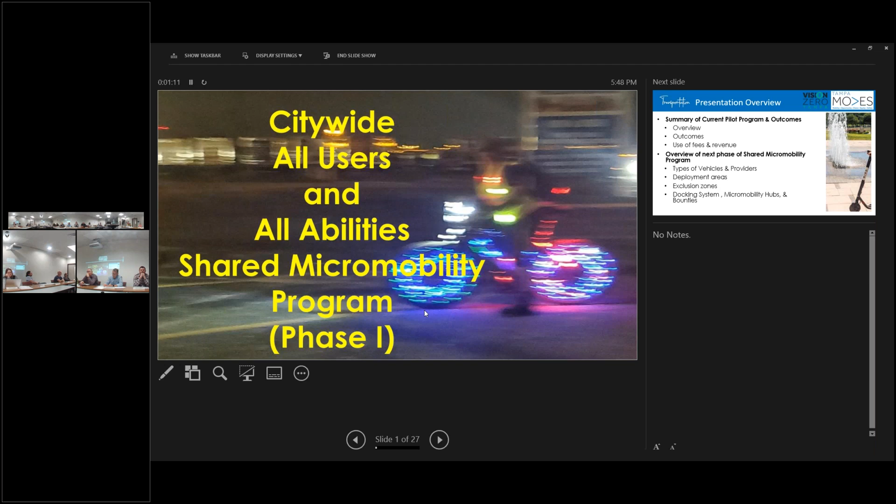Okay, hi, my name is Calvin Thornton. I'm the City of Tampa micromobility engineer. I was asked to give a quick overview of the program we have and talk about some of the things that we've done with micromobility. So tonight I'm going to give a summary of the current pilot program and an overview of the next phase of micromobility within the City of Tampa. Things we would talk about in this phase: an overview, outcome, use of the fee, types of vehicles, the deployment zone, exclusion zone, and the docking system. I won't cover everything on every slide because I shared with Wade the PowerPoint presentation, so there's a lot of information on the slides and I won't cover everything.

Summary of the current pilot program: initially, when we launched the pilot program back in 2019, we had 4 providers: Bird, Lime, Jump, and Spin. Each provider provided over 600 scooters per provider. To date, we have collected in revenue $1.9 million in fees from those providers, and that went directly to the City of Tampa coffer.

We have partners with the program. Our partners are University of South Florida, the CUTR Center, and the Valerin Group. The Valerin Group assists us in community engagement and outreach, and USF and the CUTR Center provide monitoring, community evaluation, operation, and best practice.

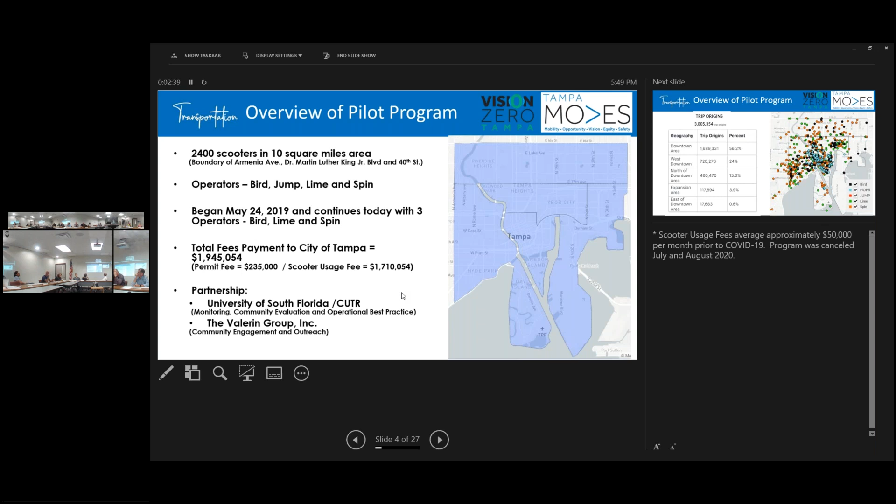As you can see, the pilot program was 10 square miles in and around the downtown area. Since the program's inception in 2019, we've had 1.6 million trips in and around the downtown area, about 700,000 in the west downtown, which is the Hyde Park area. In the north downtown and Ybor City area, we've had about 500,000. So clearly people are using micromobility in just that small 10-square-mile area.

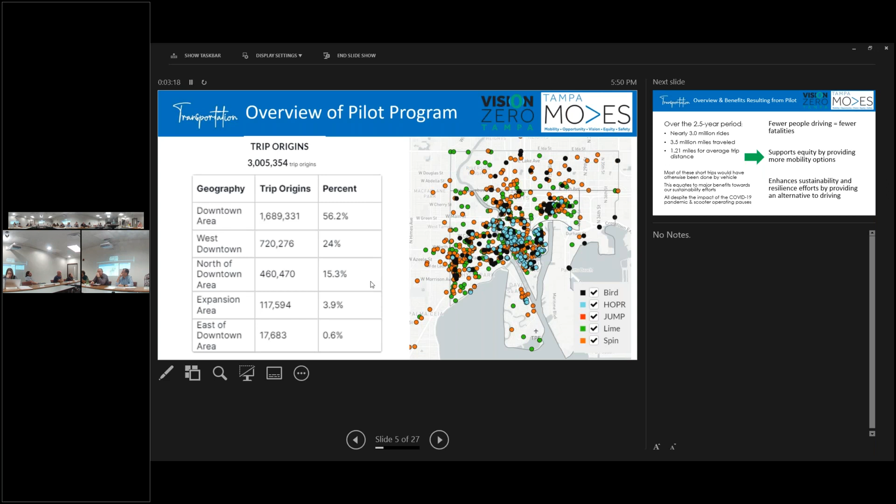This is just a repeat of what I just said. Some of the things that we've observed are fewer people driving, fewer fatalities.

One thing this does provide is some equity. I'll give you an example. When I was working in my downtown office, an individual who was cleaning the carpet came by and saw the helmets on the back wall and said, 'Hey, you got anything to do with those scooters?' I said yes. He said he used those daily to travel back and forth from downtown to work. Normally it would cost him about $5 to pay a friend to ride back and forth, but now he can ride the scooter for about $3. So it does provide some mobility for people who don't want to rely upon more costly service like a friend or the Uber system. So it is working.

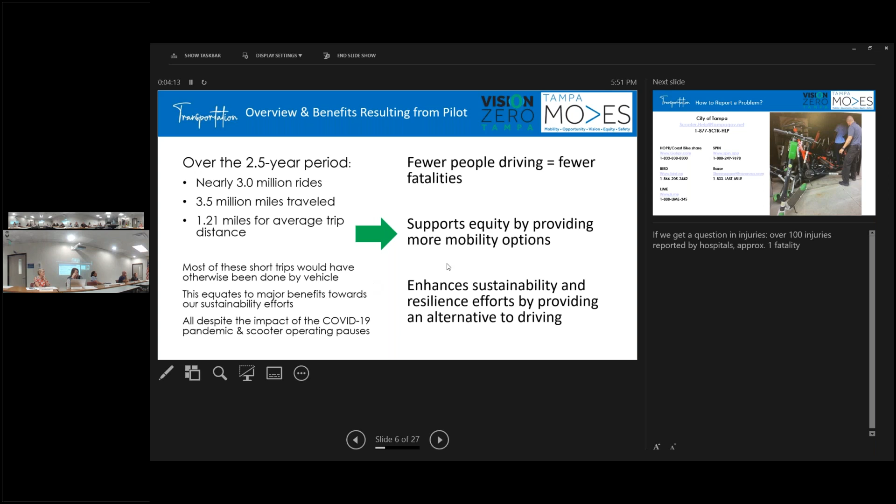We also have a number where you can report any problems. If you have a scooter that somebody left in your front yard, or if a scooter's blocking the sidewalk, we have a 1-800 number: 1-877-SCOOTER-HELP. We also have an email address, scooter.help@tampagov.net, as well as on our website, where we have all of the providers' information so you can report any problem. When we receive a problem, we immediately send out the provider and they correct it immediately.

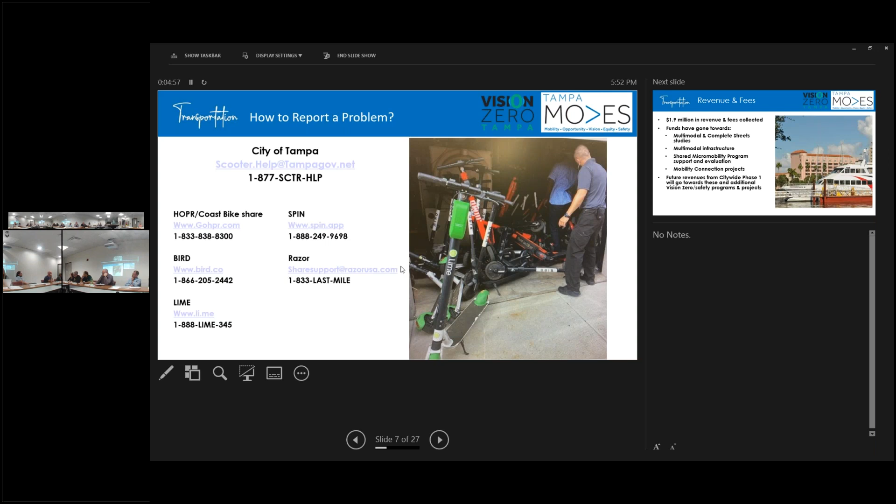Of the $1.9 million in revenues, we've spent them on things like the multimodal complete street studies, multimodal infrastructure, and working with our USF partners to evaluate the program. We've also spent some of it on connectivity.

We've contributed funds towards the Cross Bay Ferry. So you can get on a Razor scooter here in Tampa, ride the Cross Bay Ferry over to St. Pete, then get on another Razor scooter and ride around the city of St. Pete. So you can make a trip from Tampa to St. Pete without ever having to get into an automobile. You can also do the same with the Coast Bike, which is over here as well, and also in St. Pete.

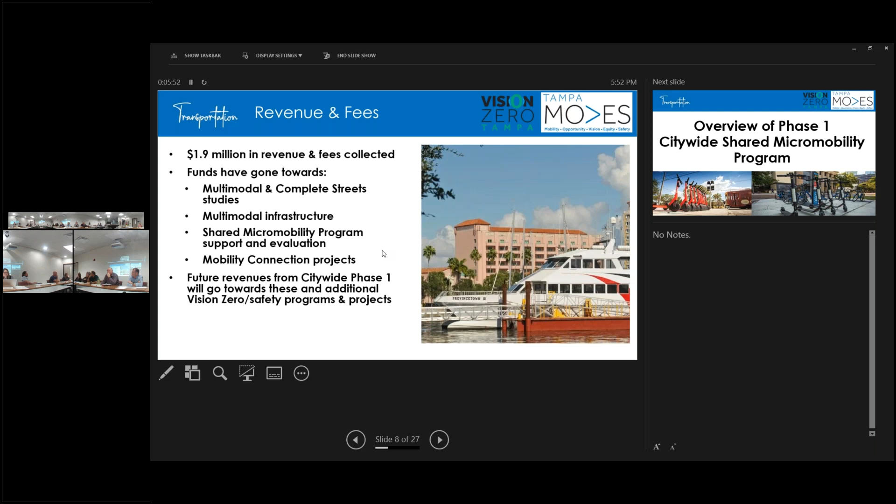Now I'm going to go through an overview of the Phase 1 citywide program. Seeing the success of the pilot, we decided to go ahead and launch citywide. In the citywide program, we're adding 1,500 e-bikes from Lime, 1,500 e-bikes from Spin, and also 1,500 seated scooters from Razor.

One of the things we heard from our ADA community is they wanted to be included in micromobility. So we require each of those providers to provide 1% additional vehicles to meet the needs of the ADA. That program is going to be geared more to the needs of the ADA. If they want some of these out on the street, then we're going to place them in the street. If they want them at a designated location, we're going to try to provide that as well. So that program is something we're going to be working with our ADA communities on to determine how best to deploy these types of vehicles.

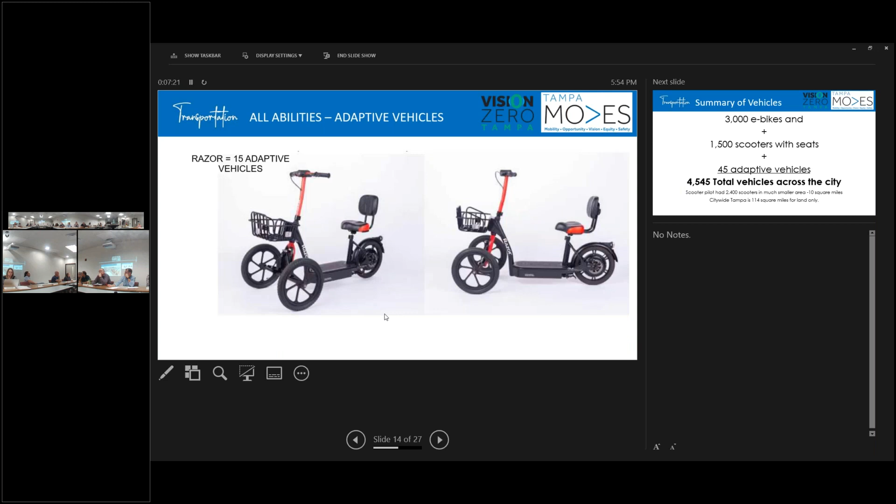Just to repeat again, once the program is fully launched, we will have over 3,000 e-bikes, 1,500 scooters with seats, and 45 adaptive vehicles all over the city of Tampa, for a total of 4,545 vehicles across the city. The city of Tampa is about 114 square miles of land area.

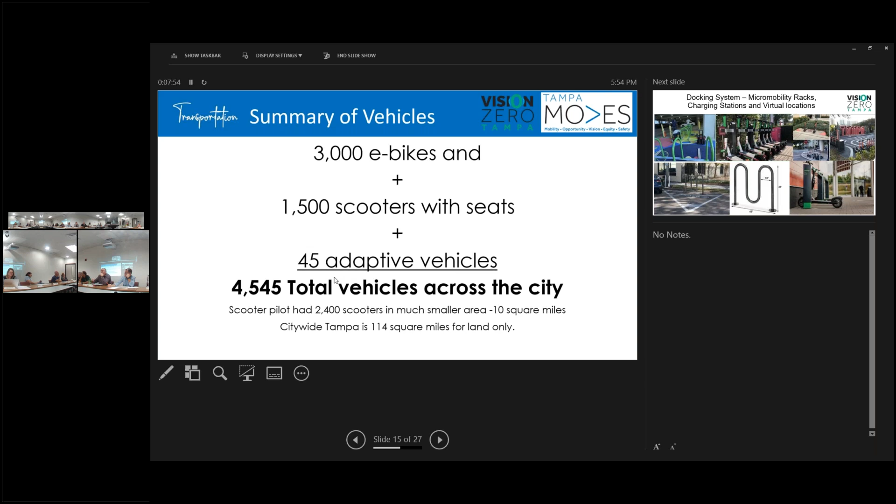The program will also have a docking system for some of those areas with high ridership, like downtown, north downtown, and west downtown. We require that aspect of the program to be locked to a bike rack or some type of scooter rack. So in that area, providers will provide racks, and you will have to ride it from rack to rack.

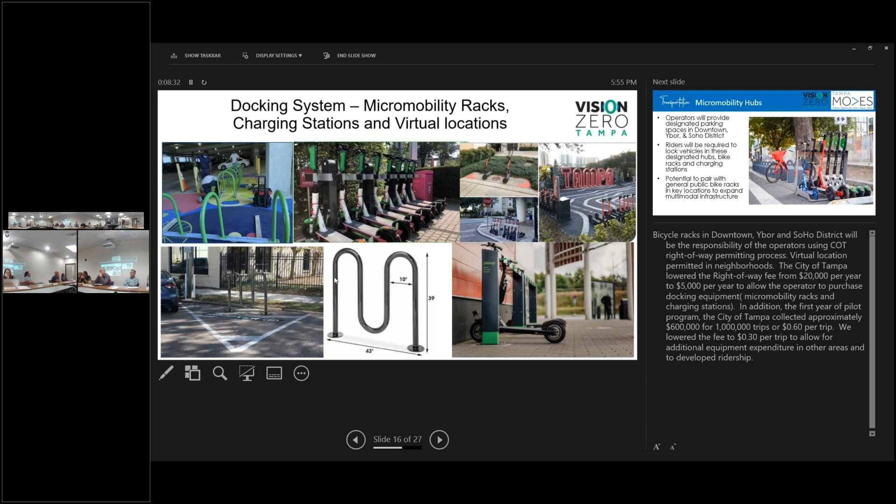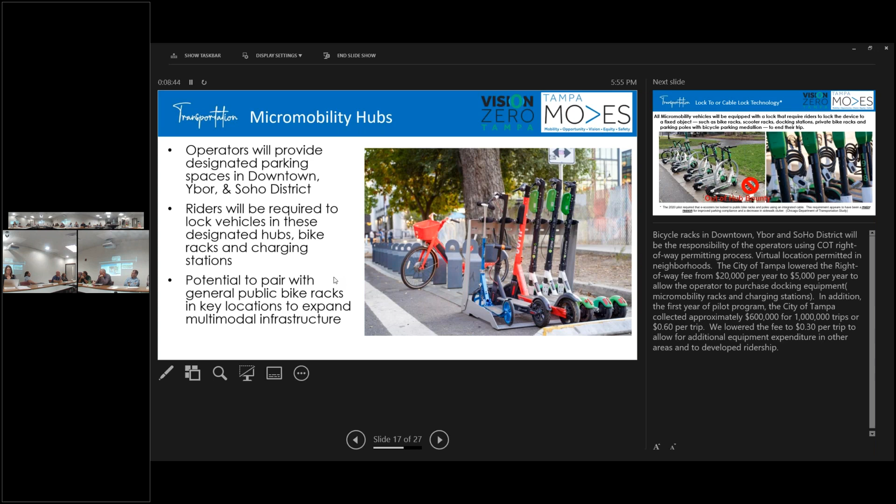Now, for individuals who want to get off anywhere, you have the ability to do that, but there will be a penalty — there will be a fee — and we call that an out-of-hub bounty system. So if you leave it out, you will be assessed a fee. And if individuals want to participate in the bounty system and place it back in, then you can collect that bounty towards your next ride or your next trip on micromobility.

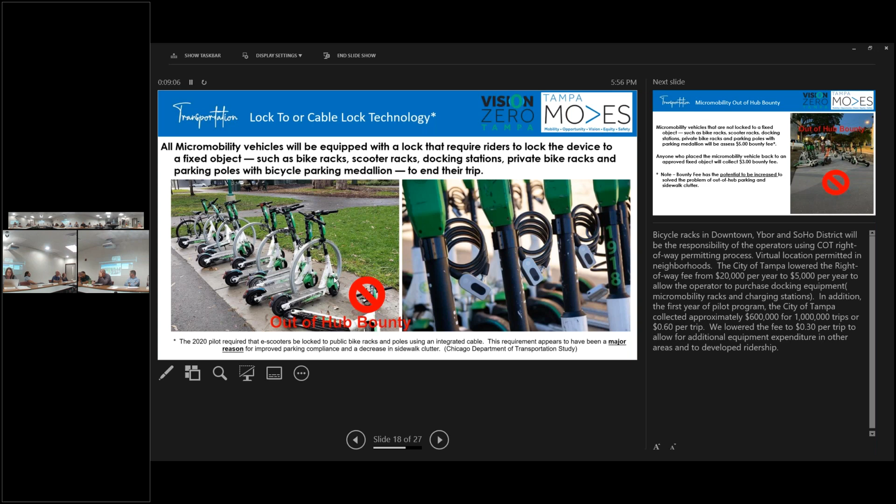An example of a bounty fee would be something like, if you leave it out, there'll be a $5 fee. For somebody who places it back into the system, it'll be $3 collected towards their next trip.

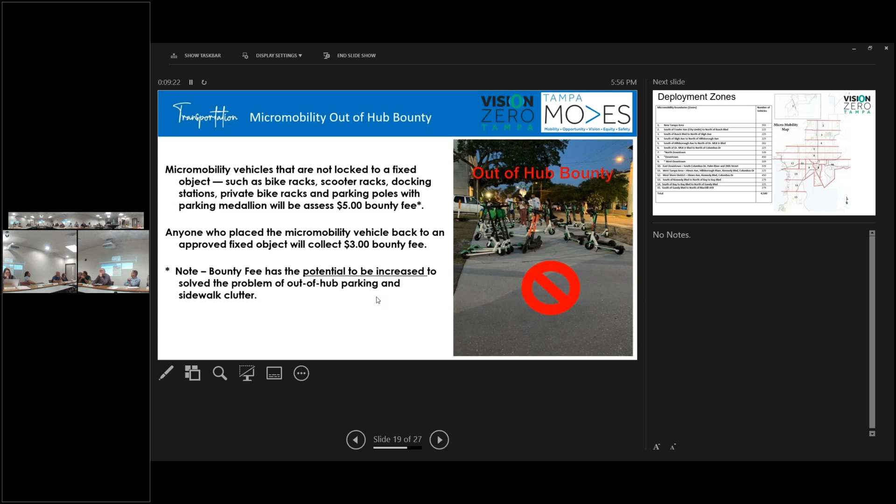To launch citywide, we've carved the city up into 15 zones. In those zones, certain numbers of vehicles will be deployed. There will always be a minimum of 50% of those numbers allocated in those zones that will be deployed into those districts, so we won't wind up with all 4,500 in the downtown area.

And to get equity into all of those zones, the operators will have to deploy a certain number of vehicles in those zones. For example, in the New Tampa area, they have to deploy 392 vehicles in that zone.

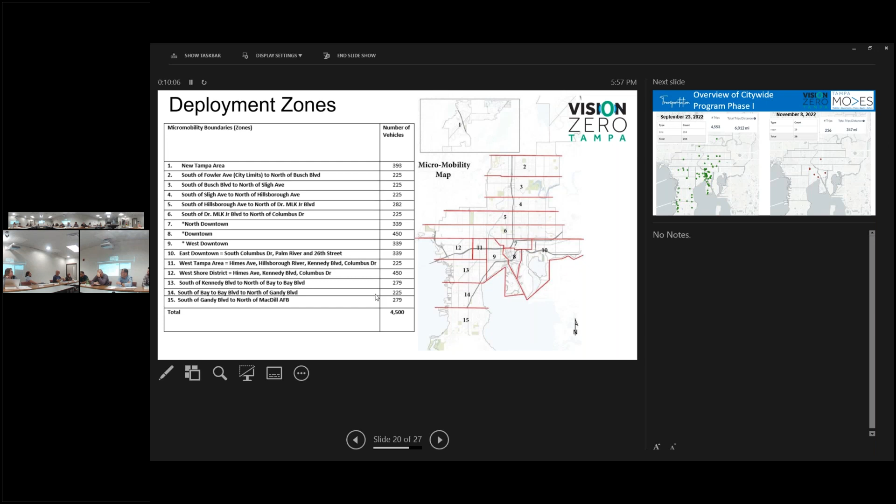This is just an overview of phase 1, as of September 23rd or November 8th for Lime and Razor, that's when they both started launching the system. To date, Lime has over 300 e-bikes in and around 14 zones. Razor has roughly about 100 scooters in about 5 to 6 zones, and Spin has over 200 bicycles across about 10 zones.

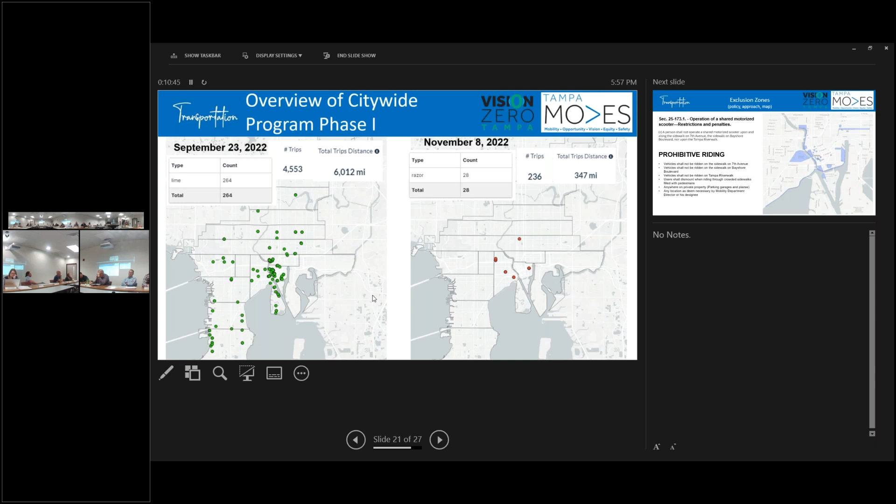We still have in place our prohibited ride locations, places like the University of Tampa, the Riverwalk, parking garages, port properties, Armature Works, 7th Avenue — places that aren't appropriate for shared micromobility, meaning they move a little too fast to be riding on the sidewalk on Bayshore or the Riverwalk.

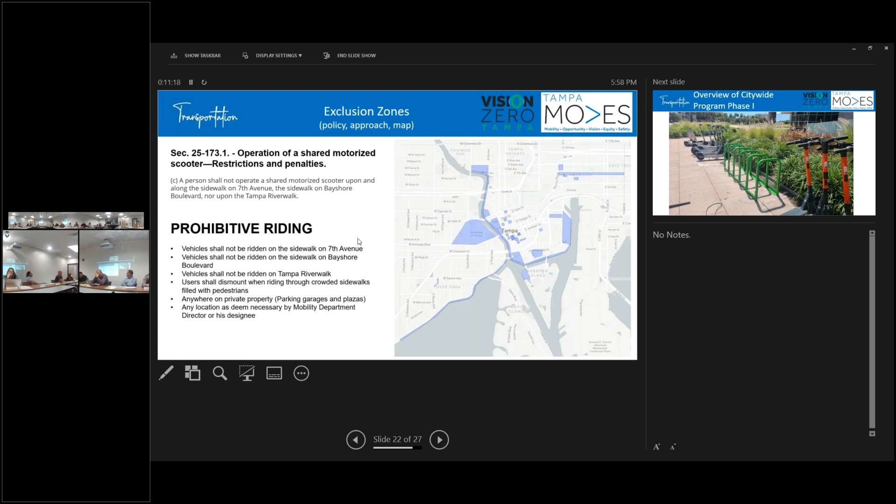Go ahead, Jonathan. All right, hey Cal, it's Jonathan Forbes. Thank you very much for the work on it.

I was wondering if you could spend some time to talk about the arrangement you have with each of the providers regarding the fees. This has been a very sensitive topic for me, because I saw a news article last week that 200 of these vehicles have been fished out of the river over 6 dives, and I don't think there's been any kind of penalty assessed against any of the providers. Is that contained in this year's contract or this phase's contract?

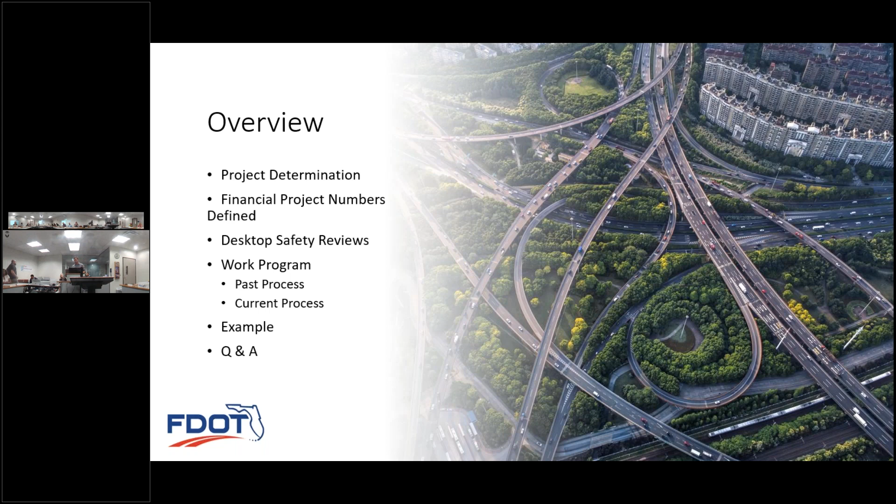We'll go. All right, so basically we're going to talk about the project determination, financial project numbers, and the definition of how that works. Then I'm going to talk about the desktop safety reviews, that's what we're doing with all the projects. I'm going to explain the work program process and how that's changed from when I first took over to now. And then I'll give a quick example and leave you guys a little time for Q&A. I'm going to try not to get too into the weeds, but feel free to ask.

So basically, District 7 for fiscal year construction 26, that's projects that are going to start getting built in July of 2026, there's going to be 230 lane miles approximately in District 7. That's all 5 counties, not just Hillsborough County, but also Pasco, Hernando, Citrus, and Pinellas County. For fiscal year 27, we're looking to do almost double that, so a lot more projects, a lot more resurfacing, a lot more construction.

And the way these projects are determined is you look at the pavement condition survey and see which roads have cracking, rutting, rideability issues, potholes, all those things go into the order of the resurfacing program and how we maintain our roads. With that said, the priority can change, we move things up and down. With that, we created a safety RRR prioritization for which roads have the highest fatal and severe injury crashes per mile per year.

So I went through all that data and tried to figure out which projects we want to really push to get as much of that safety funding into. Because really the bottom line is we're going out there resurfacing the roadway. It's a great opportunity to add a bike lane, a cycle track at Cass Street. You've already got an existing right of way. We're looking at what are the constraints, what can we do to improve the safety of honestly the biggest, scariest roads in District 7. It's a really perfect opportunity. Why do a separate project later if we already have a project coming and we know about it?

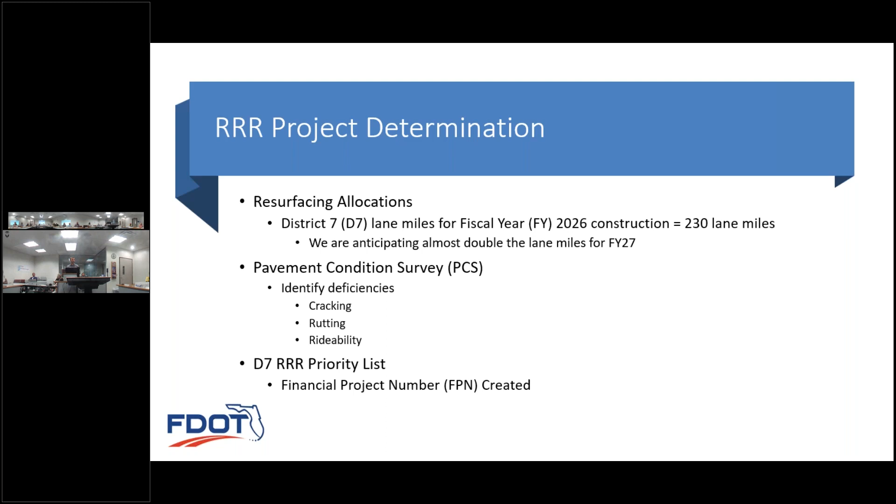So the big change, I don't want to get too much into the weeds, but the idea was to explain how it works. The item number is the financial project number. The item segment is basically what changed. All you need to know is before we just did a -1 and -2, that's the item segment, that's the only thing that's really changed. The phase is the third number, and that'll tell you if it's a 5, it's construction. The second is the type, so if it's a 2, it's a consultant or contractor doing the construction versus in-house.

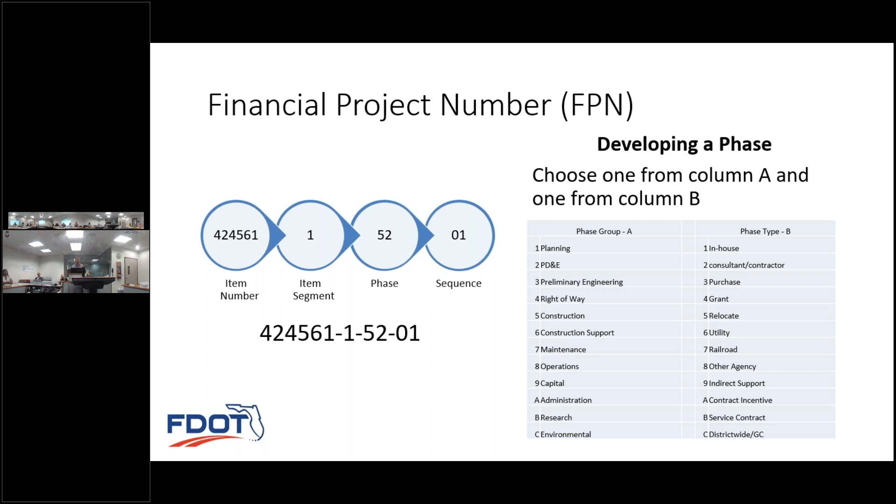I can send out the presentation if you guys don't already have it. It's too detailed here, but the sequence is how we track what kind of improvement we're adding, whether it's just resurfacing or if we're doing a crosswalk, pedestrian crossing, or some other improvement.

The way we did this is basically every single project, we did an in-depth desktop safety review, or we went out in the field and actually reviewed it. I drove all 230 lane miles and really thought while driving, what can we do here, what's wrong, what can we improve, how can we really get these improvements in. Then we look at the crash data, the roadway characteristics, traffic volume, and figure out ways we can get these improvements into these resurfacing projects.

For immediate needs, we can do a traffic service request where we just get out there quickly and add some signage or move some stuff around, because we don't want to wait until '26 for something simple, that's a long way out. So that's our short term. Midterm is with this RRR project though. This is our opportunity, we're already going to be out there, already making it a little crazy with construction, so let's get some stuff in the ground while we have that opportunity.

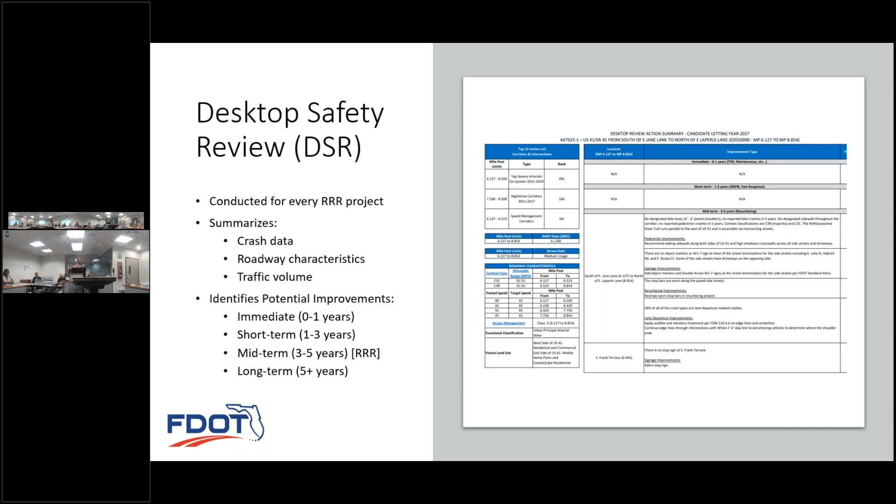And then long term is the work program. It's something big that we can't do right away, there's drainage impacts, that's a whole separate project. Then we can program that accordingly.

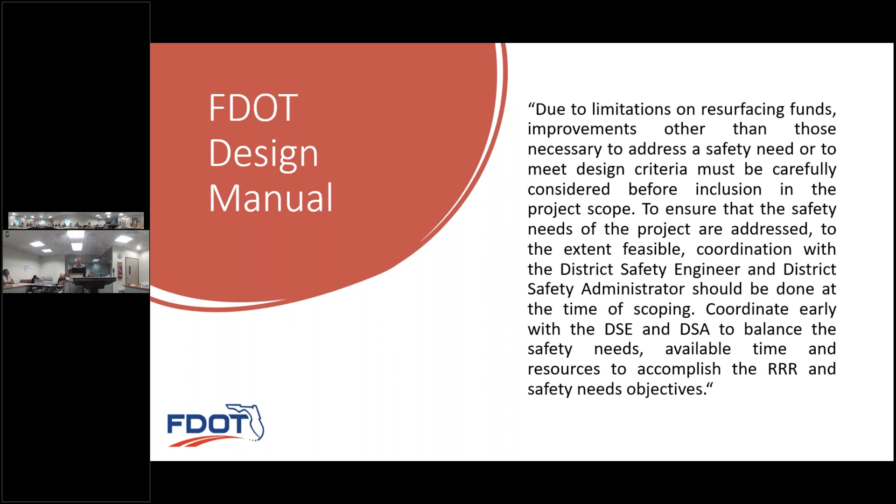So basically FDM 114 is the resurfacing. What changed when I took over the program is that DOT is pushing so hard that we said, hey, we can justify it for safety. Let's put some extra money into whatever we have to do to save a life. Obviously we have to prioritize because there's so many needs out there, but basically every decision has to come to the district safety office.

So I was kind of hinting on this, this is a big change. We've got -1, milling and resurfacing only. -2 is complete streets. -3 is safety features. So that was our past process.

So like -2, when I say complete streets, that's like the cycle track downtown. That was a really massive undertaking, figuring out how to use a resurfacing project, working with the city, how can we completely rechange the roadway but use those funds that are already there. So we had to do a -2 complete streets project.

The goal now is let's get it all into the -1, let's plan, let's get ahead, let's do it. Obviously something like a full-on cycle track, maybe we can do that if we've got enough time, we work together, we get ahead of it, maybe it's possible. That's the goal. We're not going to be able to do that on every project, but if the opportunity's there, we're going to look into it. That's why I had a meeting with the City of Tampa, just trying to make sure we coordinate.

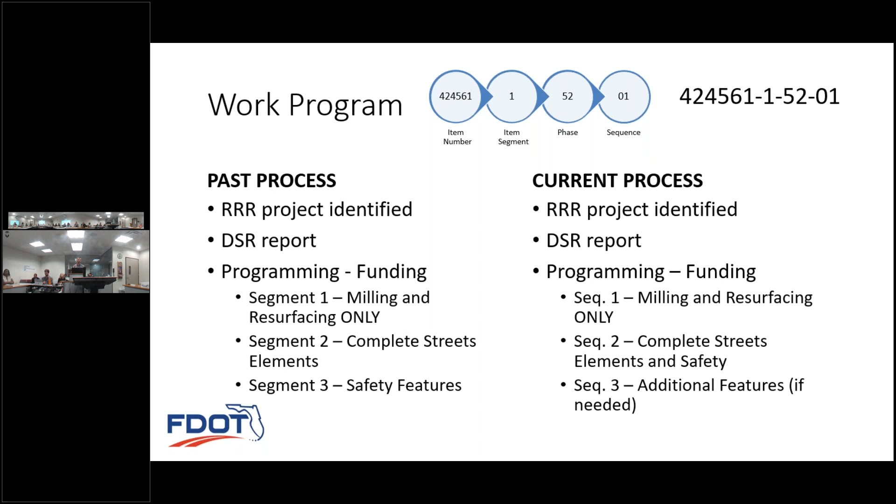But we still have that last number, which is the sequence, so that we can track the different milling and resurface, complete streets, or additional features.

So this is in Pinellas County, an example. You can see how it was just a -1 milling and resurface, and then -2 was the complete streets elements. So anything that we're doing like repurposing lanes, that sort of stuff, is -2.

But now the goal is with early project coordination between myself, the Districts, and all the different offices at DOT, we can get that all done in one process at the beginning. It's a big vision. It's not that easy, don't expect miracles, but we're trying really hard to improve the process and get a lot done with as little money as possible.

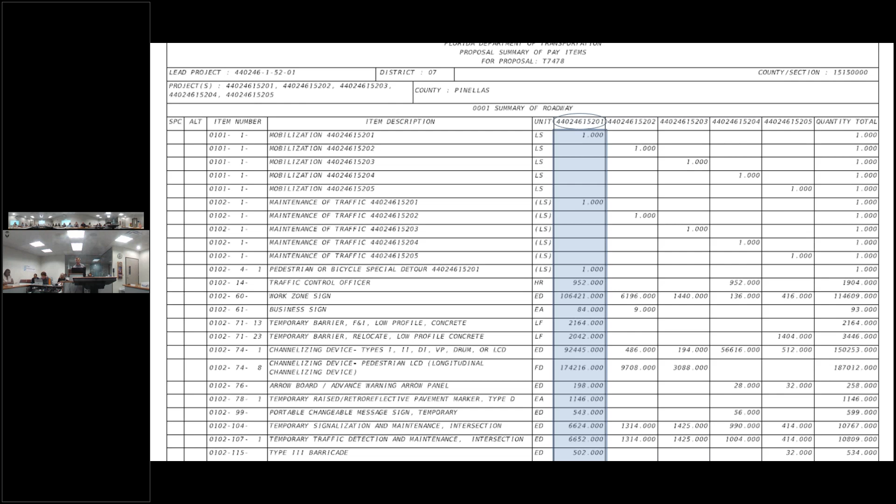So here you can see the different, there's 5 different mobilizations for the different sequences, but, a little bit in the weeds here. So, questions?

Awesome. You have any questions?

What is your top priority? You're talking about the process, do you have some priority right now? Yeah, so I don't want to get too into the details, but when I was looking at the fatal and severe injuries per lane mile per year for fiscal year 26 in Pinellas County...

It was actually in Pinellas County, it was 5 or so fatal and severe crashes per year per lane mile, versus our lowest priority was only like 1. So it's a pretty big difference. Obviously, if we have extra funding, let's put it to the top.

Right, so with that project we're looking at trying to add a few signals, and what was interesting is there were actually two different segments. On the same street, sandwiched by another one in the middle that's actually a year earlier that wasn't on my list. So I worked with them and said, hey, let's look at the typical section, the lane width, right?

And let's see, is there room to maybe add a bike lane? We narrow the lanes, you can only do what you can do. But if we're already going out there, how can we incorporate it into all 3 of these projects?

Even though one wasn't on my list, I was attending all the scoping meetings, so I could say, hey, this one was a priority for this, let's try to incorporate it.

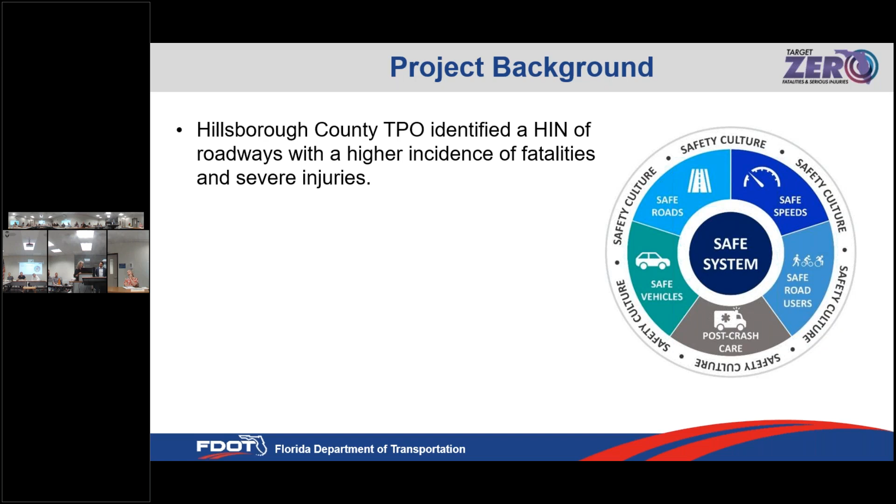I'm working with Gina and Wade and Lisa, and as you know, they have identified the high injury network. So the TPO and DOT already identified this high injury network that I'm going to be working with. They did that work for me, and then we worked together, collaborating to identify the corridors we're going to work on. And then FDOT has Target Zero.

How many of you have heard of Target Zero, FDOT's program? Okay, many hands. It's similar to Vision Zero - it's their own way to look at Vision Zero, and it's a really in-depth, great program. So we're all working towards the same goal: CUTR, FDOT, the TPO, and I'm also including US DOT's Safe Systems approach, because we're going to follow some of that in our project.

If you look around this wheel, you can see safe roads, safe vehicles, post-crash care - we want to look at if someone is in a crash, we hope they aren't, but what do we do? Post-crash care is included in this, along with safe road users and safe speeds. This program is going to focus on two of those - we can't focus on all of them, so this one is going to focus on safe speeds and safe road users. That is our focus.

A little more about the Safe Systems approach - in all of the work I do, I keep these six principles in mind. Many of you have heard them, but I'll go through them quickly. Death and serious injuries are unacceptable - we don't want to accept those, those are something we need to deal with. Humans make mistakes.

How many of you might have crossed outside of the crosswalk today as you were coming here, right? We all make mistakes sometimes. We don't want that to end in an injury or a death.

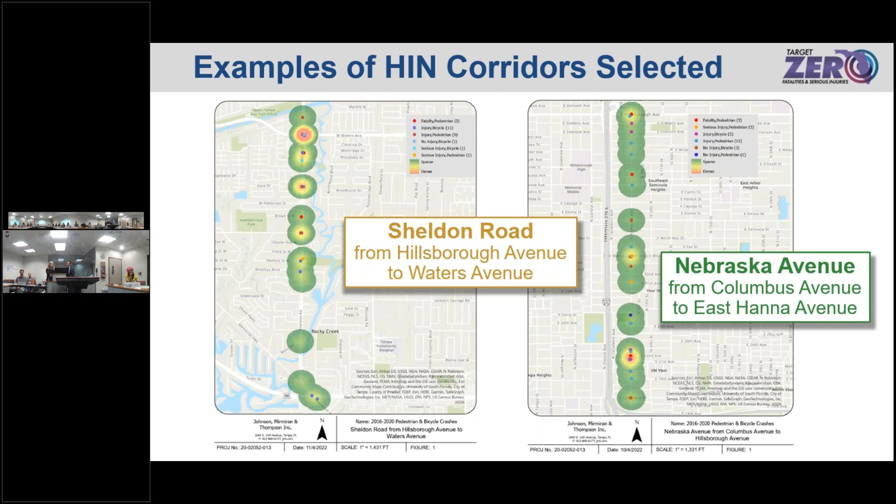Right now, we're going to assess the high-injury network environments. This is the situation analysis I told you about, and we're out there doing that now. After that, we're going to develop the campaign once we have all of that information together and all of our stakeholders' input, then look at the social marketing components and our target audiences that we'll choose.

One of the most important parts of this is we pre-test our campaigns. We never put a campaign out there unless we pre-test it with our target audience. How many of you just developed a campaign, thought it was great, and put it out there? We see that a lot. We always pre-test and learn so much. If you can pre-test your campaign, anything you're doing, you'll learn quite a bit from that. Then we will implement and manage the campaign.

I'm thinking I might have 3 months on each side as buffers, and then run the campaign during the middle of that. We have a big budget for the marketing components of this. And then, of course, we monitor and evaluate—we have an evaluation plan for this.

Our hope is when we have completed this one-year project, we're going to have some great information. It could be a model for other programs across the country. So we're hoping this goes well and that we'll have some really great results from it.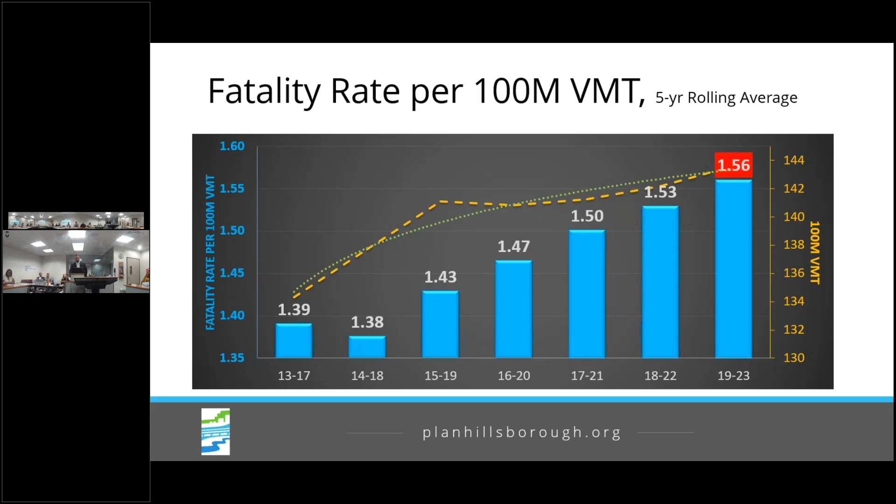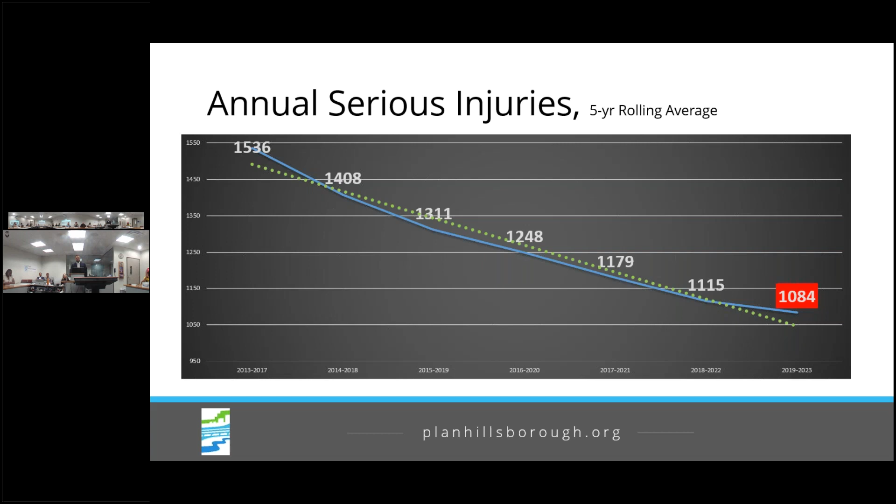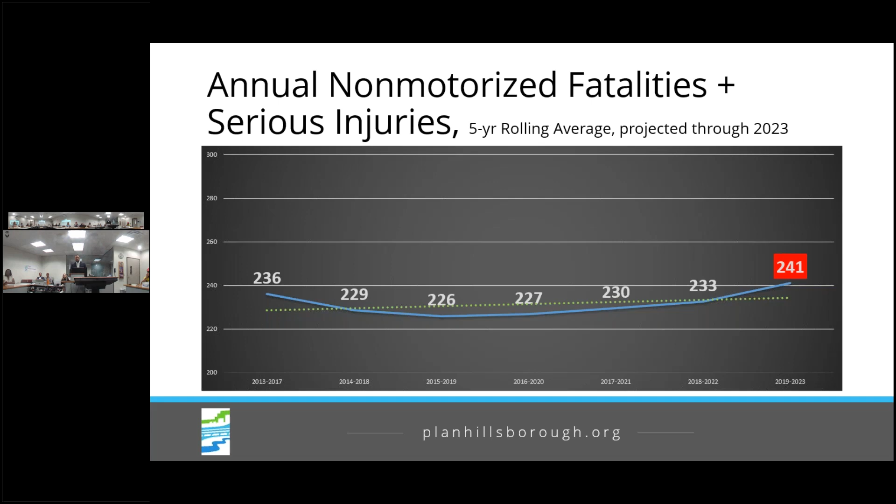The fatality rate per 100 million vehicle miles traveled is 1.56. For motorcycle fatalities, 40.21. Serious injuries, 1,084 - that's been trending down for the past decade at least, and I'll touch on why we think that is toward the end. Injury rate per VMT is 7.56. And then the non-motorized fatalities and injuries is trending up slightly - we're anticipating 241 by the end of this year.

I didn't give this information to the board or the other committees, but I figured you all would want to see it. This is a map showing all the fatal and injury bike and ped crashes in 2022.

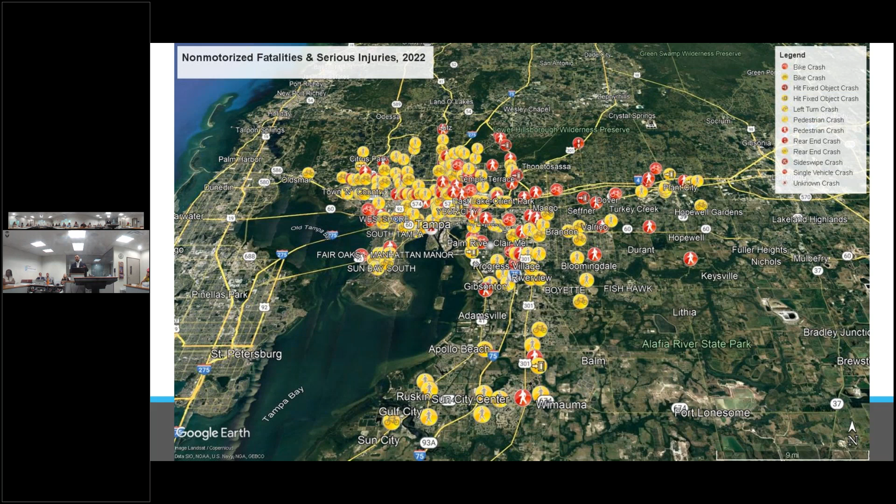You can see that it's like a scatter plot. There's a cluster in downtown Tampa, north up to Bush, Hillsborough—the major culprits. We know these are some of the worst roads to ride your bike across the county, but we also have similar problems in unincorporated county, Temple Terrace, Plant City. No jurisdiction is exempt.

It's a little difficult to read. I used an FDOT crash application to map out this heat map. You see all up and down the 275 corridor, from downtown up to Bush and maybe even north of that, is a hot spot.

There's very limited data available to us about bike and ped crashes. When I mapped out all the bike and ped fatal and injury crashes in 2022, there were 247. 132 of the crash reports showed there was no significant contributing factor by the driver. What that means to me is that the driver did nothing wrong, and I suspect that's not accurate. Obviously, if the cyclist or pedestrian gets carted off to the hospital, they can't tell their side of the story, so law enforcement is left to take the word of the driver.

Only 7 of these 247 crash reports showed that speed was a contributing factor. I also venture a guess to say that's not accurate. So our analysis of the actual factors leading to these crashes is very limited. We can't develop statistical significance when most of the crash reports show that the driver did nothing wrong.

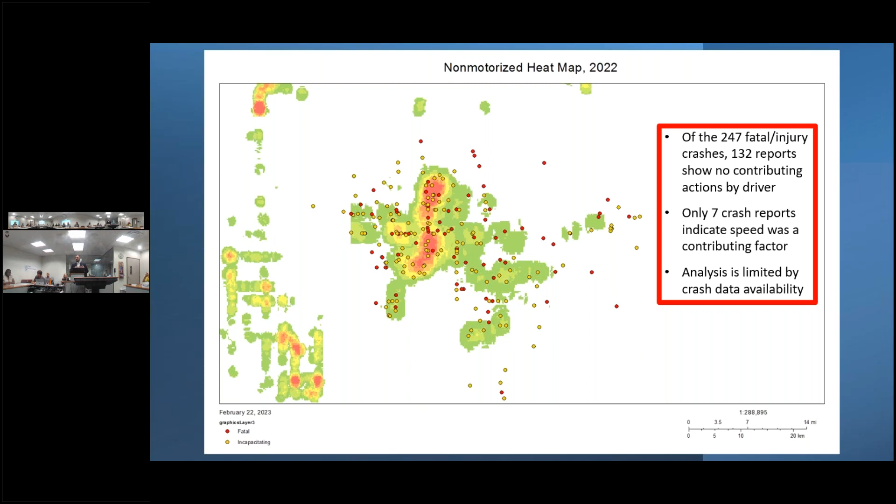Because I know a lot of you are involved in advocacy and maybe participate in the CTST, Community Traffic Safety Team, what I would ask you all to do is spread the word to law enforcement to be as accurate as possible and make an informed decision when filling out their crash reports, because we don't have data to support our proposals to address the problem. It makes our job much more challenging.

Some of the takeaways for this year are that several targets were not met in 2022. However, the year did show a decrease in fatalities and serious injuries—a huge decrease, in fact. 2021 was a record high in Hillsborough County. 2022 was not quite as bad—we had 30 fewer fatalities.

We can't attribute that to the work that the TPO or FDOT or any local government did. It's probably a result of some behavioral changes that we can't really account for. We have some ideas, but can't chalk that up to good engineering.

Motorcycle fatalities and bike and ped fatalities and injuries continue to go up. Non-motorized—so bike and ped fatalities and serious injuries—have been increasing at least over the past couple of years, and if you look at a longer time horizon, they still continue to increase. There was a 9% jump from 2020 to 2021, and then 2.5% from '21 to last year.

Some of you may be familiar with Smart Growth America's Dangerous by Design report. They look at factors contributing to pedestrian danger, basically. Smart Growth is a pretty well-respected think tank. They published their report last year, and it had a number of recommendations, things that we can implement.

Among those was that comprehensive data collection efforts need to be improved. They know the issues with the crash reports, and they also understand that it makes planners' jobs really difficult when we don't have sufficient evidence to justify our efforts.

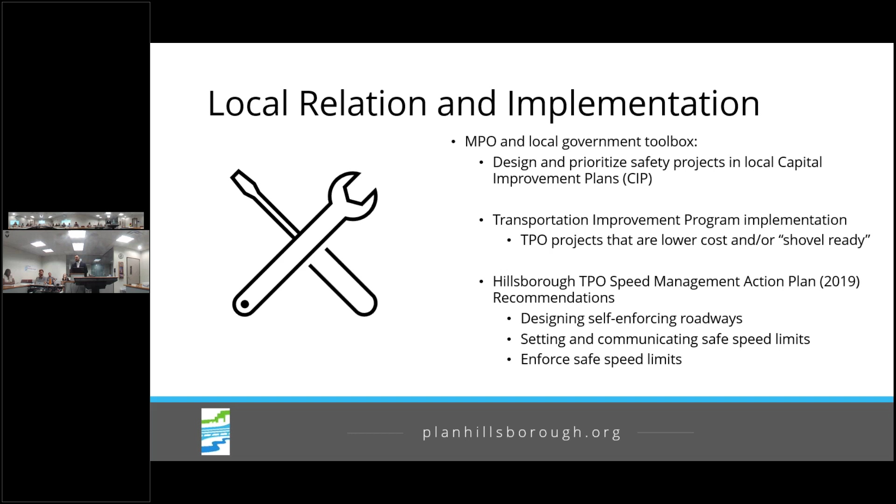Wade and Lisa and some of my colleagues that have been mentioned several times tonight already did a major speed management action plan that wrapped up a few years back that has really good recommendations for how to address this problem countywide. I think it's no surprise that speed is one of the biggest issues that we face.

I already walked you through the proposed performance targets. We proposed these to the committees and the TPO board last month, so these were already adopted at the February 8th board meeting. So this is more than anything just an FYI, and I wish I had better news to present you all with, but those are the facts.

Any questions? Yeah, Dr. Wong. The data that you're getting, the 247, is that from police reports or is that from traffic homicide reports?

So I use the FDOT District 7 crash data management system, and one of the filters you can select is contributing actions, right? So they're digitizing all the police reports for all crashes up to and including present day. And when I filtered out contributing actions, there's a long list, like a dozen or so that you can select from. The results show that there was often nothing entered. Yeah, I think that answers your question, right?

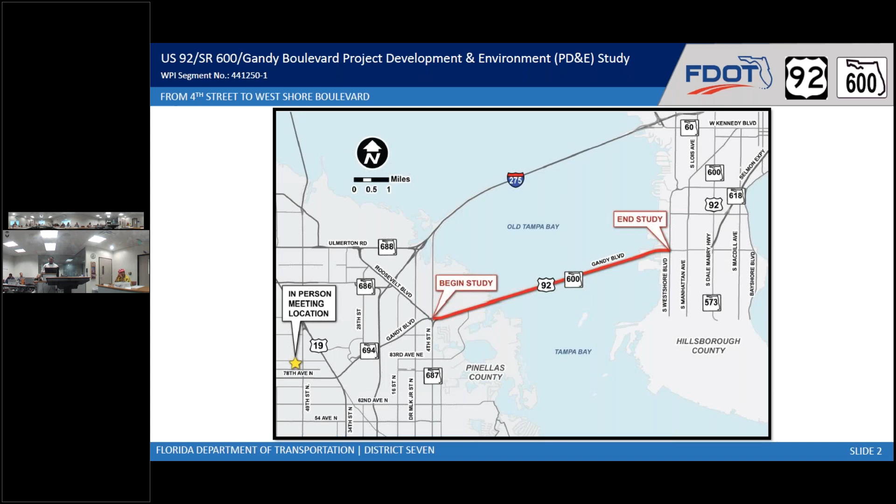First off, I just want to explain the project limits of the study. It extends from 4th Street North in Pinellas County, northeast across Old Tampa Bay to West Shore Boulevard.

Now I want to go to the purpose and need of the study. The main purposes are to reduce traffic congestion and also to improve bicycle and pedestrian accommodations. The need is provided by the fact that the segment from 4th Street to the west end of the Gandy Bridge has a deficient level of service as of 2016.

We're in 2023 now, so that's long since passed, and we're expected to only worsen in future years. The Gandy bridges will have a deficient level of service beyond 2040. That hasn't been updated since then in the study.

There's also the need for bike and pedestrian accommodations because of limited on-street bicycle facilities and trails. There is a trail on the north end of the project, however, that does not continuously connect to trails within the project corridor. There are sidewalks on the south end, but those are not continuous along the full limits either. And there is a 4-foot shoulder that can be used as a bike lane, but it's not striped until one direction after Brighton Bay Boulevard.

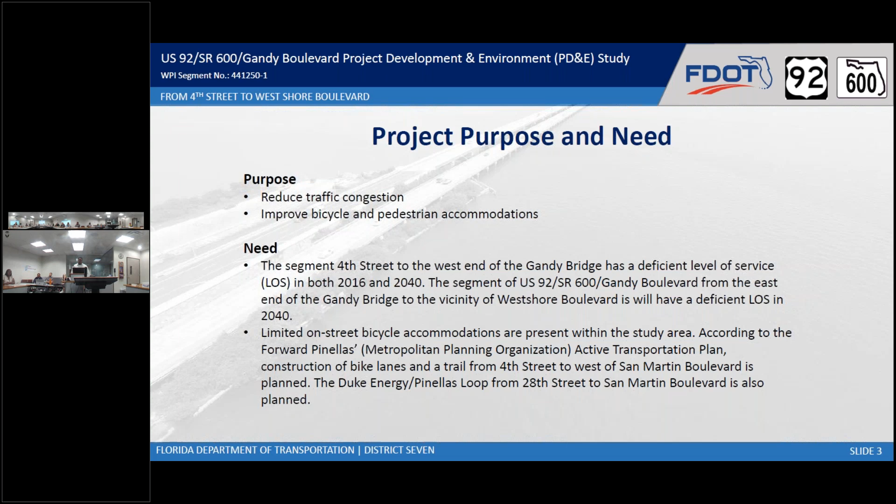So we broke up the project into 3 main components. The first component is the Pinellas segment, around 3.6 miles from 4th Street to the west end of the Gandy Bridges. The second segment is the bay segment that extends from the Gandy Bridges over Old Tampa Bay. And the third and final segment is the Hillsborough County segment, from the east end of the Gandy Bridges to West Shore Boulevard.

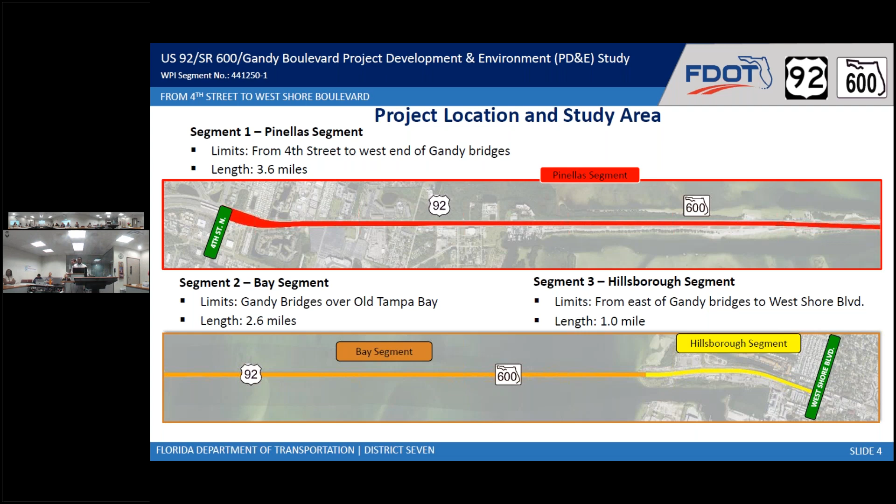Now, Gandy Boulevard is an important east-west corridor in both Pinellas and Hillsborough counties. It is part of Florida's strategic intermodal system. It connects regionally to I-275, US 19, the Lee Roy Selmon Expressway, and it's also a hurricane evacuation route that connects regional centers in both St. Pete and Tampa.

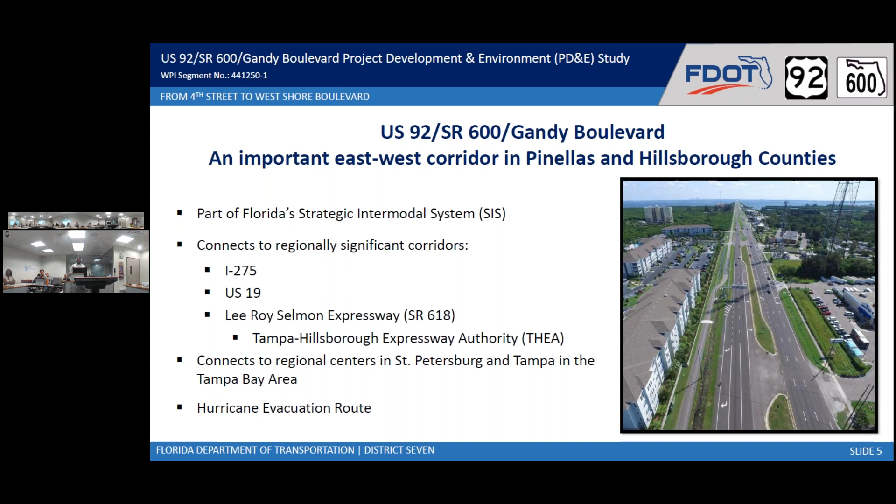I just want to quickly review the existing typical sections. In all these typical sections, we are looking east, so north is to the left, to get your position. The existing typical in the Pinellas segment is typically 4 lanes, 2 in each direction, with a 12-foot trail on the north side. There are sidewalks sporadically on the south side, but since it's so sporadic, we didn't feel it met the typical. The second segment is the bay segment, comprised of 2 bridges.

You'll notice there are different heights because the bridge on the left was built in 1996, and the bridge on the right was built in 1975, and as we go through the years we set the grades based on updated data for structural integrity. Both contain 2 lanes in each direction with 10-foot outside shoulders and 6-foot inside shoulders. The third and final typical section is the Hillsborough segment, which consists of 2 lanes in each direction at grade.

There are limited trails on the north and south sides at various locations, but again, it's not connected throughout the whole corridor. There's also the Lee Roy Selmon Expressway, which just opened up a couple years ago, and this segment is actually managed by the Tampa Hillsborough Expressway Authority and not the Florida Department of Transportation.

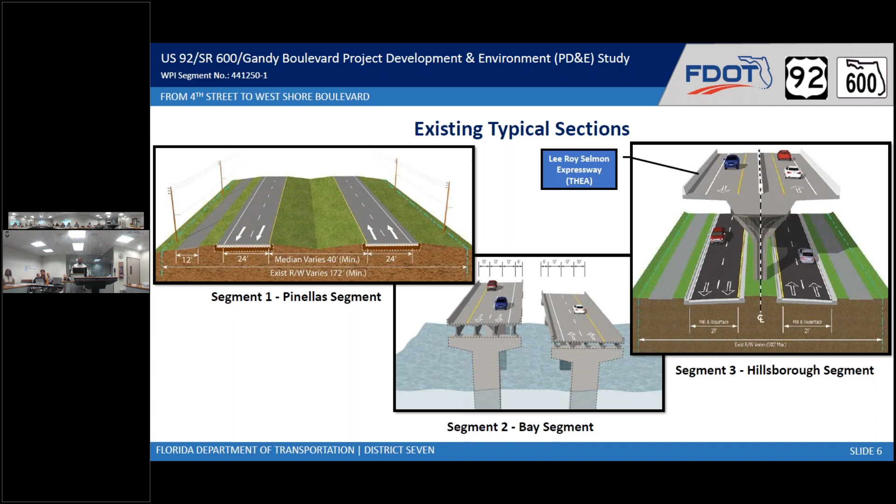Now onto the proposed typical sections, starting again in Pinellas County, from 4th Street to Brighton Bay, and also from San Martin to east of San Fernando Drive. That's typical section number 1. We're proposing a grade-separated 4-lane divided roadway with 10-foot outside shoulders and 8-foot inside shoulders.

It would also have frontage roads, 2 lanes in each direction, with a multi-use trail on both the north side and the south side. So we're able to not only complete the trail on the north side, but also add a full trail segment on the south side as well.

So we're very excited about that. And also by grade separating and migrating the traffic, the majority of the traffic into those grade separated lanes, which means frontage roads reduces the volume of traffic on those frontage roads a lot. So those bikes and pedestrians will have a lot less exposure to fast-moving vehicles.

Typical section number 2, this is actually in between those 2 segments of typical section number 1. This is from Brighton Bay Boulevard to San Martin Boulevard. You'll notice that it's on a viaduct in this portion.

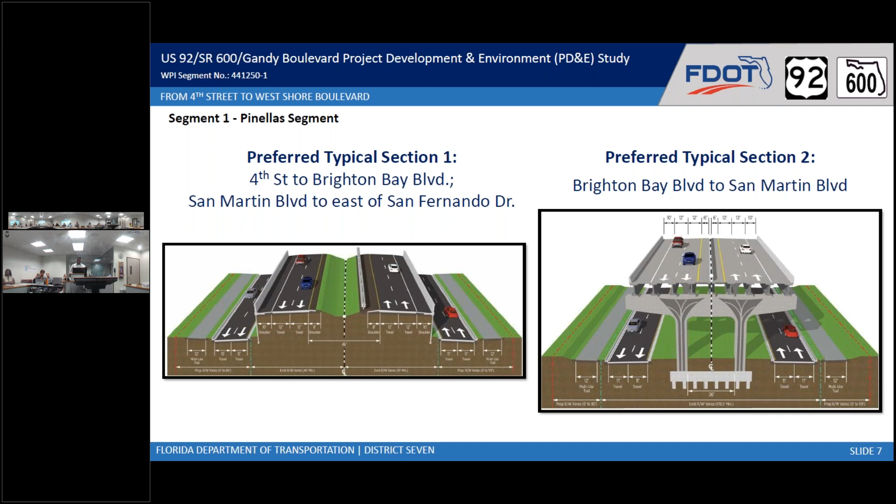And the reason why we put it on the viaduct is to the north are some apartment buildings that have been left at the original, we call it MSE wall section. That would have residential impacts or residential relocation. So the viaduct is more expensive, but the payoff is that we don't have to relocate folks, and that's more important. So we're able to tuck those frontage roads underneath, which speeds up the section around that area.

Now moving further east, this is from San Fernando Drive to the west end of Gandy Bridges. You notice that we migrate to a 3-lane typical section on the grade separated portion. 3 12-foot lanes in each direction, 10-foot outside shoulders, 10-foot inside shoulders.

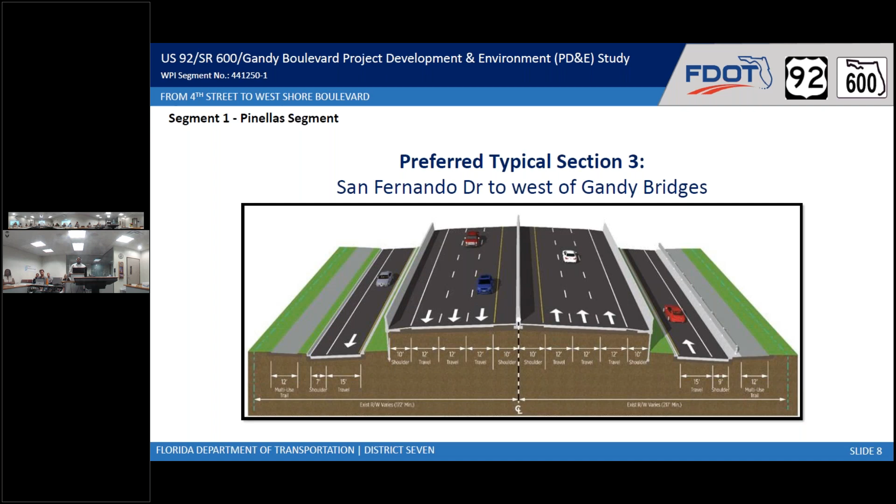And the frontage roads, we narrow down to 1 frontage road in each direction, and we continue that 12-foot multi-use trail. And this is the area that you notice in the causeway portion. So there's a lot less traffic on those frontage roads in this portion.

Now moving on to the bridges. I'm going to start to the right and then move over to the left. So to the right, that is the 1975 bridge. So that bridge, this existing eastbound bridge, will be demolished, and the existing 96 bridge, which is to the left, can be widened.

That bridge was specifically built to withstand the weight of a widening of a capacity job, so we can widen that one, while the 75 bridge to the right was not built to the same standards. So that substructure can't support the weight of the additional structural material and the traffic. So that's why that one has to be demolished.

And moving over to the left is going to be a new westbound bridge. So both these bridge structures, when widened, they'll have 3 12-foot lanes in each direction with 10-foot shoulders on both the inside and outside. And then the northern side of the structure, that will have a 16-foot multi-use trail along the 2. So this will connect both Hillsborough and Pinellas counties.

And at the end of each bridge, we'll be able to connect the trails underneath, so that folks on the south side will be easily able to get over to the north side without having to worry about crossing the grade separated portion. There'll also be other crossings located along the roadway, which I'll get into in the next slides.

And the third segment, typical section number 5, is for Hillsborough County. You'll notice that we're not proposing any widening within Hillsborough County. We are proposing the extension of the multi-use sidewalks. So they'll vary from 6 feet to 12 feet whenever practically possible. And on both sides of the bay, we're looking to connect to existing trail systems or future planned trail systems.

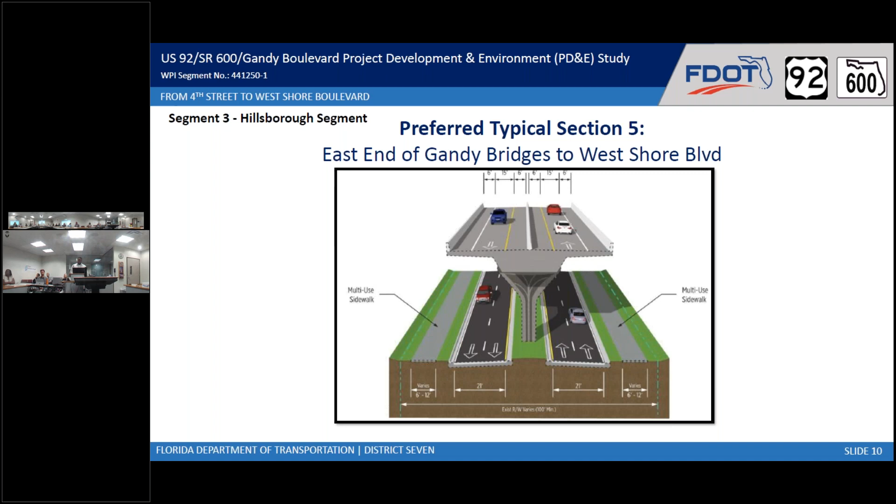We'll also have, just east of San Fernando Drive, 3 different full median openings located at different locations: 1,400 feet, 4,600 feet, and also 9,000 feet east of San Fernando Drive. So that kind of starts around where the gateway is on the Pinellas side. All these 3 are on the Pinellas side.

And then moving further along the causeway, there'll be other openings, which will have trail crossings at each of those openings. Right now, they're proposed as stop control intersections, and for coordination, they need to be signalized and certain things worked out for that in the design phase.

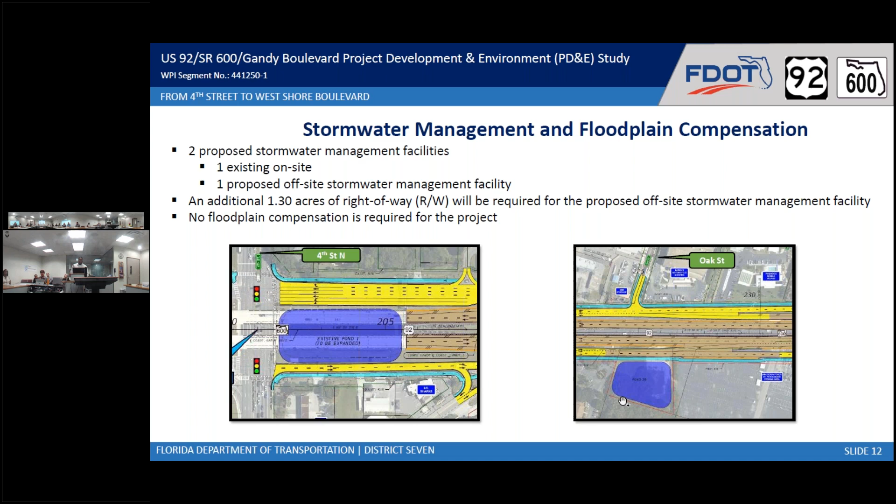As part of the PD&E study, we also look at natural resources, cultural resources, social, environmental effects, and physical effects, ranging from wetlands, archaeological features, relocations, and also air quality, noise, and contamination. More information about that will be available at the public hearing coming up next Tuesday.

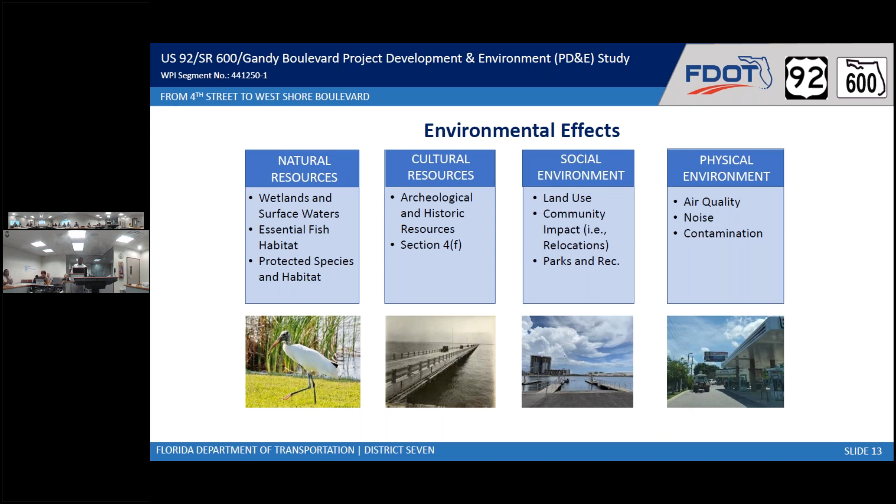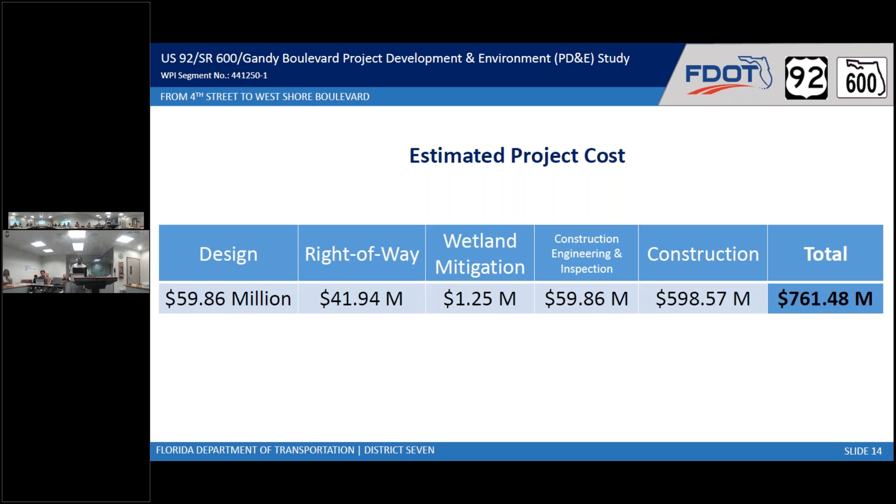Reviewing the project costs, the design is $59.86 million, and this is for all three segments we're looking at. The right-of-way costs are around $41.9 million, and construction is $598.57 million. Again, this is for all three segments. So the total cost is $761 million.

This is consistent with both the Forward Pinellas and the Hillsborough TPO long-range transportation plans. Currently, the section that we have funding on, the design segment for Forward Pinellas, is listed as priority number 20 in their LRTP.

The study began in February of 2020, and we continued with data collection through August of 2022. We did have a delay there. As you know, what happened in March of 2020 was that the whole world kind of flipped on its head. But thankfully, we were able to push forward and still get to this point.

Preparation of documents is ongoing. We do have draft documents stored both at the department and the library and on the project website. We're anticipating public hearings next Tuesday. I have more information about that on the next slide. And we're anticipating approval of the PD&E study in the second quarter of 2023.

As far as funding goes, the only portion we have funding for right now is the design segment of the Pinellas segment, for fiscal year 2022 to 2023. Right of way is not currently funded, neither is construction. The same goes for the other two segments. While they don't require right of way for the Bay segment or the Hillsborough section, since it's all within FDOT right of way, we do not have any design funding or construction funding for those segments right now.

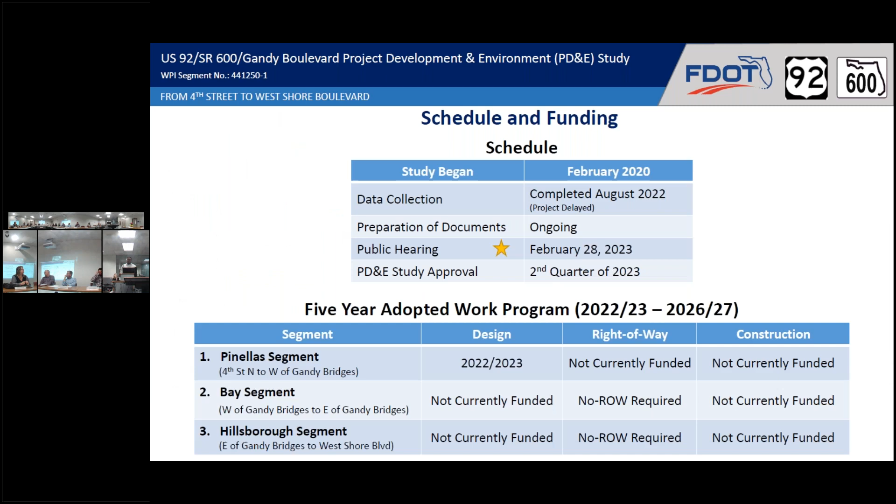Understood, thanks. Peter Davitt. Can you go back a couple of slides? You had a slide showing the Center Park trails. Keep going... the typical section, no, come back to me, the other way. Towards the end, go back, go forward I guess. Yeah, alright, stop here.

So these traffic lights, not really sure where we're at on this. So we have a trail here. Now if you wanted to go to downtown St. Pete, I think you go down San Martin on a bicycle. Does that make sense, Jonathan? No, this is on the Hillsborough side. Oh, this is the... no, yeah, you're going to St. Pete, that curves around, right, San Martin, put you down by Riviera Bay.

So you're going to put a light here, I guess, because right now if you're riding your bike along here and you have to get to San Martin, right now you've got 2, 4, 6 lanes of hopscotch. So is that the plan here, or were you saying something about an underpass or something?

So the underpass that I mentioned is more towards the ends of the bridges, so you can go underneath the bridges. But here, there will be trail accommodations to cross the intersection, but instead of crossing the 4+ lanes plus turn lanes at this intersection, now you'll have just the 2-lane frontage roads to cross on each side. Talking about traffic volume.

Right, because this piece is elevated, I guess. Yes, sorry, the elevated portion is in dark orange. So the center portion here is going to be elevated, carrying the majority of the traffic, and the brighter yellow portion to the north and south are the frontage roads. So there'll be a way to go under this overpass, this elevated part? Yes, that's correct, the trail will be at grade, same as the frontage roads. Right, so folks will be able to just cross underneath, just cross the frontage roads instead of having to cross the whole intersection.

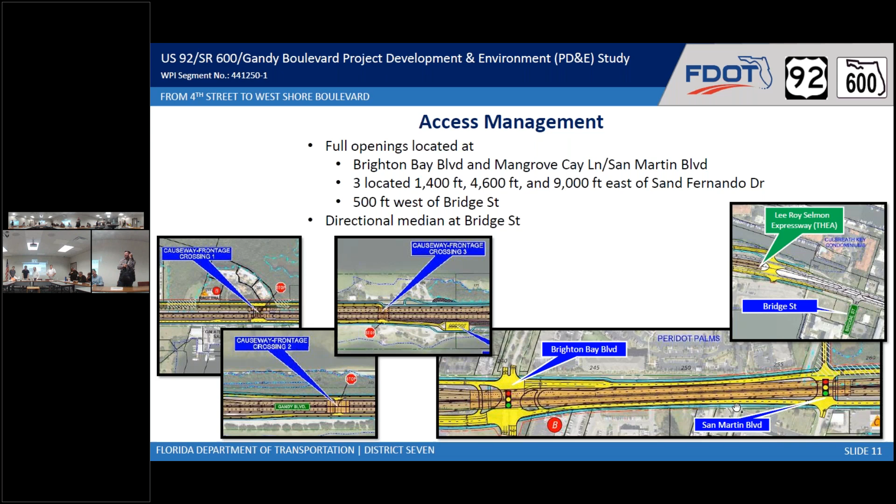Yeah, that's a lot. We have to go like 9 o'clock at night. You're like... oh, that's a lot.